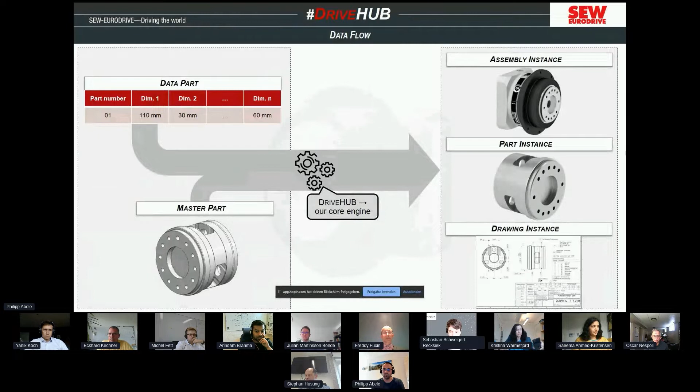The system is based on an event-driven architecture, mainly powered through Apache Kafka. The idea is that we have Kafka, a message broker in our system, which receives requests from producers to produce parts or drawings from our modular gear unit system. And the consumers are dedicated workers in our cloud computing network who will actually produce the requested data. We do this divide and conquer concept for scalability and for availability.

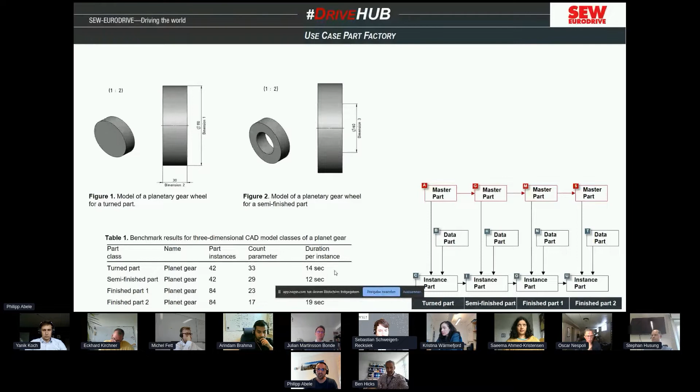And here you see, for simplification reasons, just the drawing of a planetary gear wheel we are producing. Giving you just a few numbers, we have 40 parts in the turn part section and 80 parts in the finished part section, and we're producing these parts in 12 up to 19 seconds. This gives us an agile way of doing lots of loops during our design cycles. Due to the processing time of SolidWorks, the times for producing drawings are a little bit longer, but in fact getting the data takes longer than producing the drawings itself.

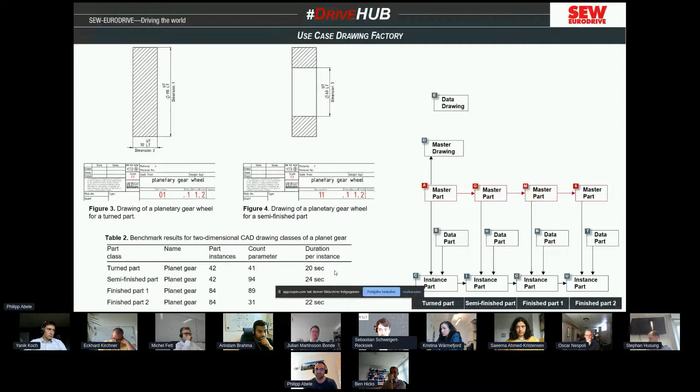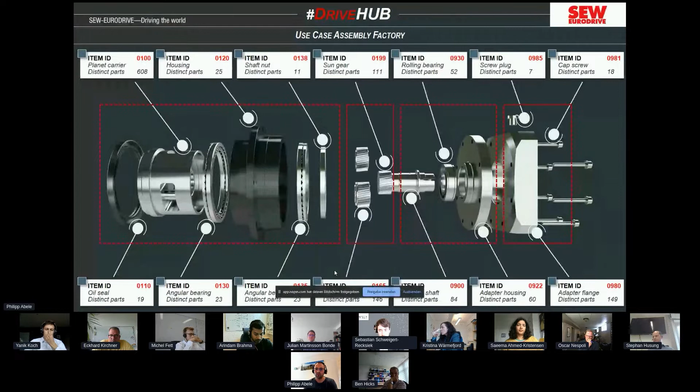And to fulfill the sketch, it's also necessary to connect the drawings and the master data with the instances. And how does the system look? We are following an item ID concept. So we gave the system certain sections and divided it so that it is possible for several people to work in parallel in a distributed way on the same data set. We also set up a use case for assembly manufacturing, and we set it up in the same manner as for the drawings and for the parts.

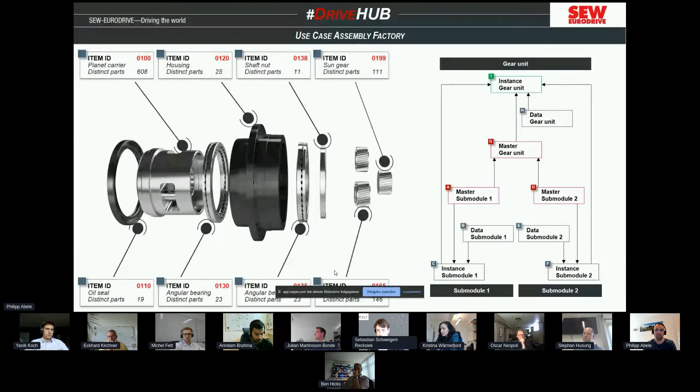We have some master files and we have some master data in our database, and then we have some workers in our cloud system who are combining these parts to produce fully digital assembled gearboxes for further processing, for simulation or other topics.

Yes, and that was it. A rush through our DriveHUB framework in 7 minutes, 20 seconds. And feel free to contact me and get ideas how we work with this automated data in later stages like calculation, simulation, or also in engineering or variant configuration. Yes, thank you.

Thank you very much for that first inspirational presentation. I already started to take the first notes myself. If there are no emergency questions to Philipp, I would propose that we continue with the second presentation. I got the note here that Rikard Söderberg is going to give the second presentation, due to the fact that he's also having to manage a couple of different meetings.

Rikard, are you on? I can't see you. I think it's Kristina Wärmefjord who holds the presentation. Kristina, sorry, that was my fault. Sorry for that. Yeah, the stage is yours. If you want to share your presentation, we're happy to listen. Thank you. It seems like I lost the share button. It used to be there, but it's not anymore. The share button is right below our videos. It's the display which is crossed with a red line. Yeah. I needed to leave the full screen. So let's see.

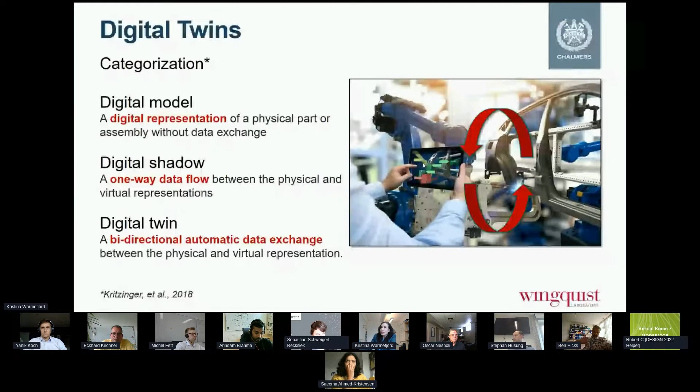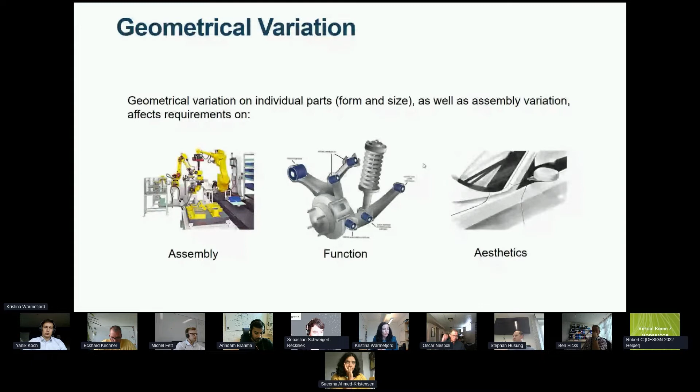So we start with that and try to apply it to this research area, which is about geometry assurance and geometrical variation. And the problem that we are dealing with in this area is that we have geometrical variation on parts. Due to the manufacturing processes, they vary in form and in size. We have assembly variation, joining process variation, and that might lead us to products that do not fulfill the assembly requirements, so they do not fit together, or it can be functional or aesthetical requirements that are not fulfilled on product level. So we need to deal with that.

And the input is part tolerances or part inspection data together with information about the assembly process and the part geometries, of course, and so on. So this is done at many larger OEMs and manufacturing companies. They do this kind of simulations to predict what variation you will have given certain tolerances, certain concepts, and so on. So we start with this.

But if we have the simulation model during the production where we have inspection data, let's say that we scan all the parts on part level, we can use that to feed our simulation model, and then we have a digital twin, because we can use this information to optimize the joining process, for example.

So we can suggest that, okay, based on those parts that we have scanned data of, how should we adjust the joining process? So we can match different parts, what we call selective assembly, that this part goes well with this part. We can do small changes of the locators in the fixtures, or we can change the sequence in which we, for example, spot weld the parts together. That, okay, now we choose this sequence or this sequence, which is the best one for this assembly.

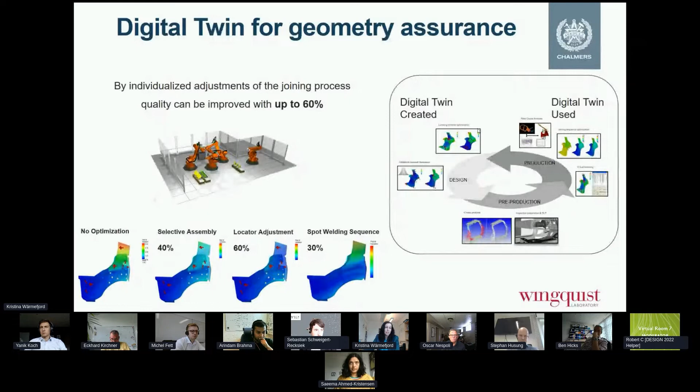But the thing that I wanted to raise here in this context is that we need, of course, to feed the digital twin with the right data. And I think that goes for all different application areas, that it's very important what kind of data we use as input to our digital twins. And no matter what accuracy we have in our simulation models, if we do not have a good input, then it's not so very useful. So, of course, we need to have the right kind of data.

So in our cases, we need to measure the right parts. We need to keep track of the parts and so on. We need to be aware of inspection accuracy, so we have good measurement equipment. We need to think about how to inspect things. For example, I have some picture here showing a quite complex fixture.

And when talking about sheet metal parts like I do here, it's quite common to put them in a fixture and we apply a lot of clamps. But then we actually deform the part, so we measure more the shape of the fixture than the shape of the actual part. And that makes the data not very useful for those kind of simulations where we want to predict spring back and so on. So instead we should measure it in a non-over-constrained way. And we are actually working together with Volvo Cars on this to use much simpler equipment during inspection instead of those complex fixtures.

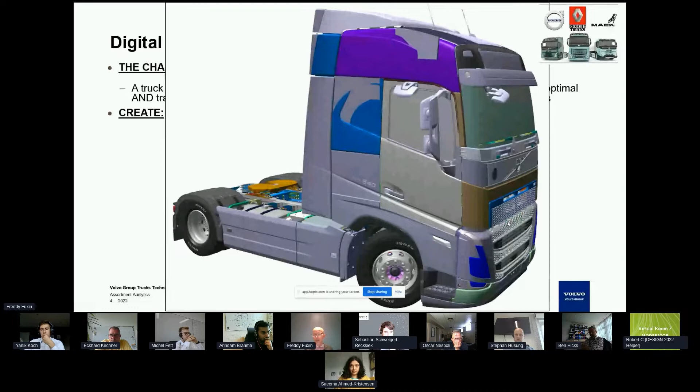When we come to a situation that we have millions and millions of combinations that we need to position correctly and model correctly, it becomes a little bit challenging. And that's really what we are facing today. So in this area of creation, we have spent a lot of time in the area of product structure, how we build up our PDM systems, but also in the area of how we actually create the geometry and which practices and methods that we need to take into account.

We have also adopted a philosophy where we are distinguishing between physical bill of materials and digital bill of materials. And that also implicates that we need to take in the bridging dimension to this, the bridging between the digital bill of material and the physical bill of material. Another thing that is challenging is, of course, different phases, early phases versus later phases and so forth inside the creation setup.

And then on top of that, we are not only selling; the truck is also utilized at, for example, the bodybuilders or in CA, custom adaptation activities, which is a true challenge because then they're actually modifying our digital twin. So when it comes to the consumption area, we must bring those dimensions in from sometimes external partners in order to have a true digital twin. And that is one of the challenges with the consumption phase, which is really the long phase in the product life cycle, because it lasts at least somewhere between 7 to 12 years normally for a truck.

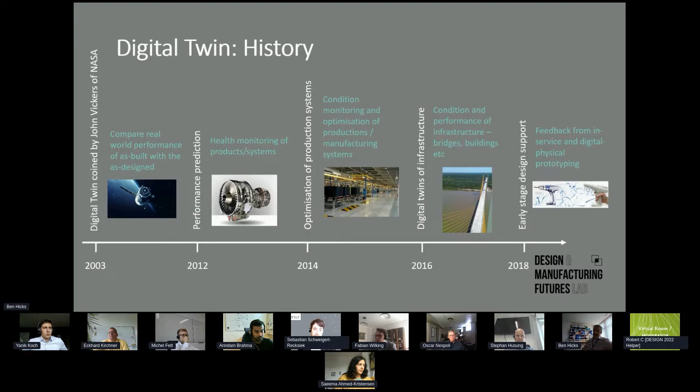Those sorts of techniques were built upon and I suppose applied in the aerospace sector in particular, where they had a lot of existing tool sets around condition monitoring, to sort of take those to another level, whereby you started to have this closed loop. So companies like Rolls-Royce, often highlighted as one of the world leaders in digital twin technology, certainly for gas turbines.

About 2014, the sort of paradigm of digital twins has been applied to production systems quite effectively. An area we as a research group did a lot of work in. You have your SCADA systems on your factory floor, so you've already got a lot of sensing and instrumentation, and it was about then integrating that with the models, sort of discrete event simulation type, such as AnyLogic or Witness. So you can actually almost close that loop and do real-time simulation and feedback and squeeze out a little bit more efficiency or greater productivity for the production environment or production system.

Around 2016-17, we started to see digital twins being applied to infrastructure, and the idea there really was to start to close the gap between what happens in reality and the models themselves, to improve the models, so things like substructuring and structural dynamics of those buildings or assets, to try and close the loop and understand why the models were over or underestimating, and to refine and improve those models.

And then 2018 on, we've seen quite a bit of research across the world where engineers or engineering design researchers are starting to ask the questions, what could a digital twin offer during the early stages of the engineering design process? So Freddy alluded to that sort of creation phase. What value can a digital twin offer, and how can those assets be used ultimately to create a digital twin, perhaps through life cycle?

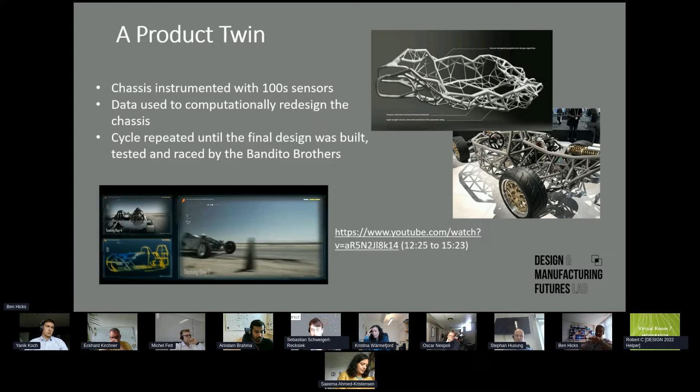This is an example of Autodesk where they used what we call a product digital twin, instrumented a chassis with hundreds of sensors, collected data, redesigned the chassis, and iterated around that until they built the vehicle, which was raced by the Bandito Brothers. A good example of performance twin, for those not familiar with it.

It's definitely worth looking at the latest papers and white papers published by Rolls-Royce, because their digital twin technology is two-way now. It's not just sensing things and reporting back. The control center can request specific information from engines in specific formats, and actually request that and assimilate that. And importantly, what they're doing is looking at the context.

They're looking at and understanding engines, different parts of their flight path, different conditions, whether that be an ash cloud or similar, on different routes. And they're then looking at that contextual information and refining and optimizing their engine performance for those particular contexts or routes. So they're learning and transferring learning dynamically as they go, with about 14,000 engines currently being monitored.

Then the third one, which we often talk about, is a production twin. And certainly as a group, we do quite a lot on this, where we're looking at the whole system, the manufacturing system, and then machine tool level. And we are modeling the whole system or factory floor, and looking at, whether it's a GKN, etc., how in real time we can modify, change the assembly process, for example, such that we achieve overall compliance.

And these can be to drive process optimization, quality management, etc. So those are three quite generic examples where digital twins offer value. So then it begs the question, when and why do we twin if twins aren't for everyone?

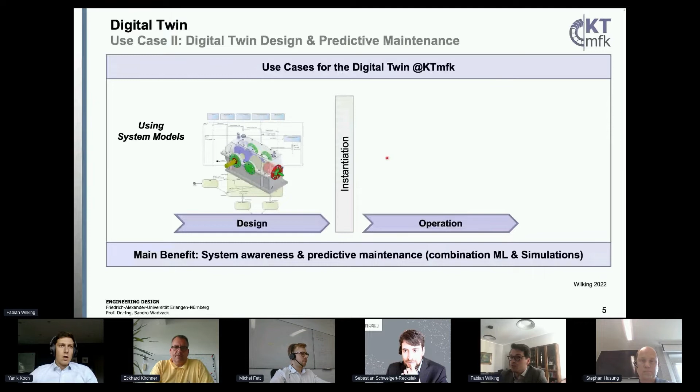I come from the field of systems engineering, so I feel very safe using system models, and system models help us to grasp the complexity of our system. Especially with complex digital twins, we need to model that complexity. This helps us to communicate with other people involved in developing the system. But we were thinking, well, we have this complexity model, this behavior model. So why don't we further utilize them to actually make them part of the digital twin, or in this case, the digital master?

So what we can do is define the behavior and directly turn it into executable code for our digital twin. And we can set specific scripts, so we can start simulations, we can run machine learning out of it. That's, as we heard before, a very interesting aspect of the digital twin. We don't only have simulations, where we get precise information about our physical twin through the digital twin, but we can also integrate machine learning. So we can combine fast, quick machine learning aspects with detailed simulations, and see what the benefit of combining this would be.

So what is the main benefit of utilizing system models for the digital twin? Well, we get the good parts of the system awareness.

For using these system models, we can directly utilize them for our digital twin to actually construct our digital twin, and for example, in this case, achieve something like predictive maintenance, where we combine the simulations and the machine learning part. That's basically it about our use cases at the chair.

We also came up with 3 questions for future challenges. The first one is: how do we overcome the complexity and interdependencies between sensor data? I introduced that a little bit before with the system modeling, but I guess there's way more discussion we can have about this. Then one aspect that we never really talk about in engineering, but that is really, really important as we have been talking to specific enterprises now, is: how do we consider legal aspects?